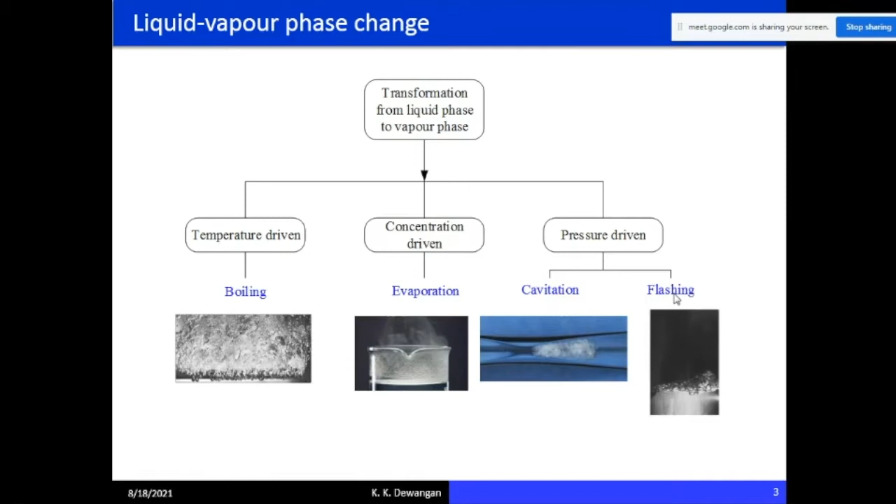Flashing is a more common term used with different words for this phenomena - flashing, flash evaporation, rapid boiling, front propagation, adiabatic phase change, and so on. Because in this process, we are not providing any kind of heat for the phase change - it is pressure driven. So, if you are taking one common definition for this flashing or flash evaporation phenomenon, it is...

When liquid is in a saturated state, or in a subcooled state, and it is suddenly depressurized, the liquid becomes superheated at that reduced pressure. For example, if a liquid in a pan is at 80 degrees centigrade at atmospheric pressure, and we reduce the pressure by some method to 0.2 bar, at 0.2 bar the saturation temperature is nearly 60 - I don't know the exact value, but it's close to 60. Since the initial temperature is 80 degrees and the saturation temperature at the reduced pressure is 60, the liquid becomes superheated, which is a non-equilibrium or unstable state.

Then what will the liquid do? The liquid gains thermodynamic equilibrium through rapid evaporation. This kind of phenomena we call flashing. Coming back to the definition: when liquid initially in a saturated or subcooled state is suddenly depressurized, the liquid becomes superheated. Then, to regain the thermodynamic equilibrium state, rapid evaporation takes place. That's called flashing or flash evaporation.

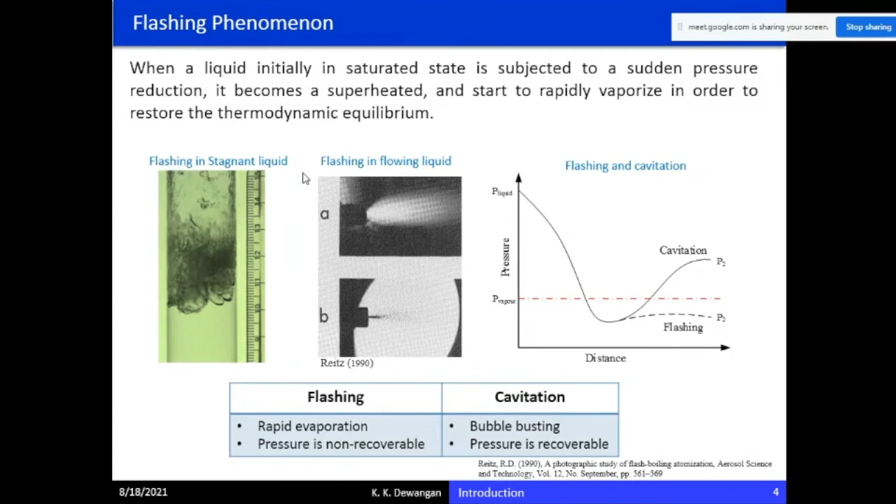Now, why do we need to study this flashing process? There are so many applications, starting from desalination, that is purification - there is a conversion of saline water to drinkable water. There may be a future requirement for this due to the lack of drinking water.

This desalination process is based on flash evaporation. Another application is spray and atomization, like in internal combustion engines where they use atomization. Nowadays there's much more interest in better atomization for better combustion processes, and flash evaporation also helps this atomization process.

Next is the medical industry, where we also use flash evaporation, such as in nebulizers and inhalers. The medical industry is very rich in this now. Flash evaporation is a main phenomenon for spray formation. The nebulizer and inhaler are utilized well for patients facing problems with their inhaling system.

Next is the power and cooling cycle. We already saw the geothermal flash power plant, where some kind of evaporation process uses flash evaporation like that.

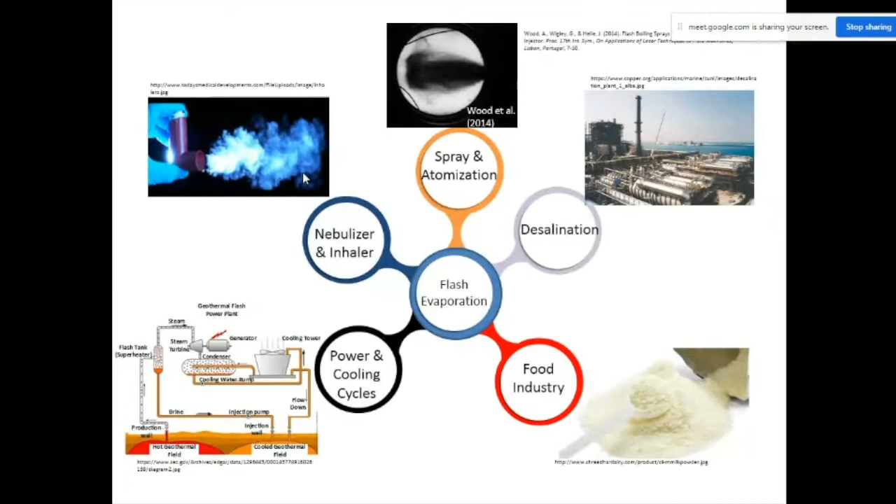This flashing phenomenon is not always beneficial to us. It is not that flash evaporation only gives us a number of applications - this phenomenon also causes some critical issues in hardware. So understanding it is very important, either to prevent accidents or to utilize the phenomenon.

Just like a knife invention, we need to study this phenomenon both for its applications and to avoid these kinds of accidents.

Like the loss of coolant accident, which is a very dangerous and huge accident in nuclear power plants, where cooling liquid is circulating in the pipe at very high pressure and high temperature. If there's any crack in the pipe - for example liquid flowing at 50 bar - and a crack occurs, there's a sudden blast. This is called a loss of coolant accident.

Then there's the volatile liquid accident, which is very rare but well known - like the blasting of an LPG cylinder in a house. LPG, liquefied petroleum gas, is compressed and stored in the cylinder in liquid form. If there are any cracks, normally it's not a problem, but in many cases we hear about LPG cylinder blasts in the news, which are very drastic in nature. This blasting is also associated with the flash evaporation phenomenon because it's a very rapid expansion process. If any crack happens by any medium, liquid comes out from the cylinder in an uncontrolled manner, causing the blast. And if the liquid stored in the container is flammable, then this problem becomes very critical.

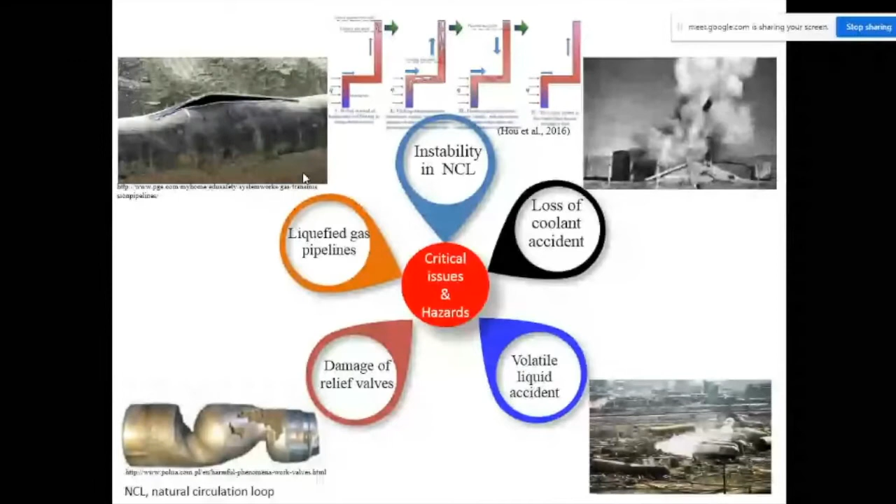I want to highlight one specific point. The flash evaporation topic is very broad, and I've only covered one part of it, which is the flashing front and nucleation sites.

Before going to the main experiments, let's see what flashing is, using the PV diagram, that's pressure versus specific volume. For water, we know the saturation curve well: liquid phase, liquid-vapor phase, and vapor phase, with the critical point and saturation lines. Until undergraduate studies, we've already seen these things, but there's an insight that is often missed in undergraduate books.

If we take the isothermal line in the PV diagram for water, this is a constant temperature line going down. We know it reaches the saturated liquid line. In the liquid-vapor phase change process, both temperature and pressure are constant, then it comes to the vapor side.

But in the liquid region and vapor region, between these two there is an unstable region, which we call the liquid-vapor zone or liquid-vapor dome. If you look very deeply in this region, the line is not straight. The isothermal line goes down, reaches a minimum point, then increases again, with curve-like behavior.

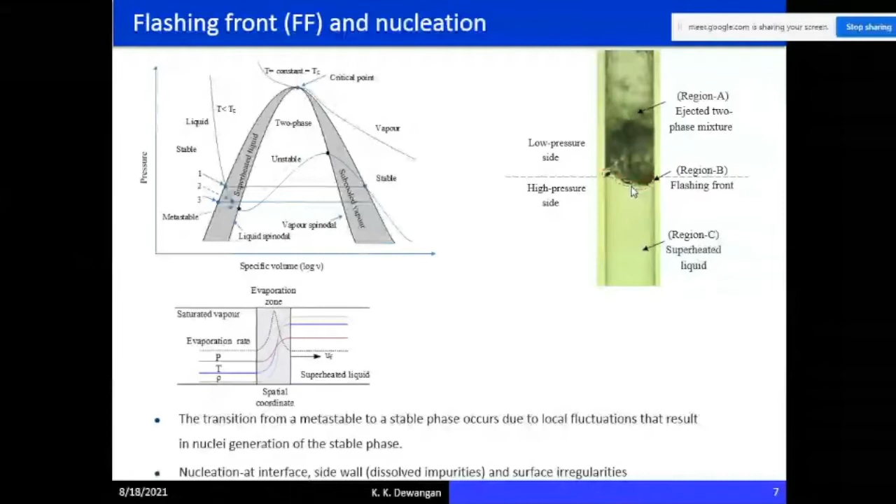Similarly here, an evaporation front is propagating through the liquid, ejecting the two-phase mixture. Why do we need to study this flashing front? First, for fundamental understanding of the phenomena. If a liquefied or compressed liquid cylinder bursts, we need to know how evaporation will take place, how much the evaporation rate and mass flow rate will be. This flashing front gives a systematic way to analyze this kind of accident.

Now we come to the gas dynamics aspect of this process, because pressure changes are involved, and it's not only associated with thermodynamics.

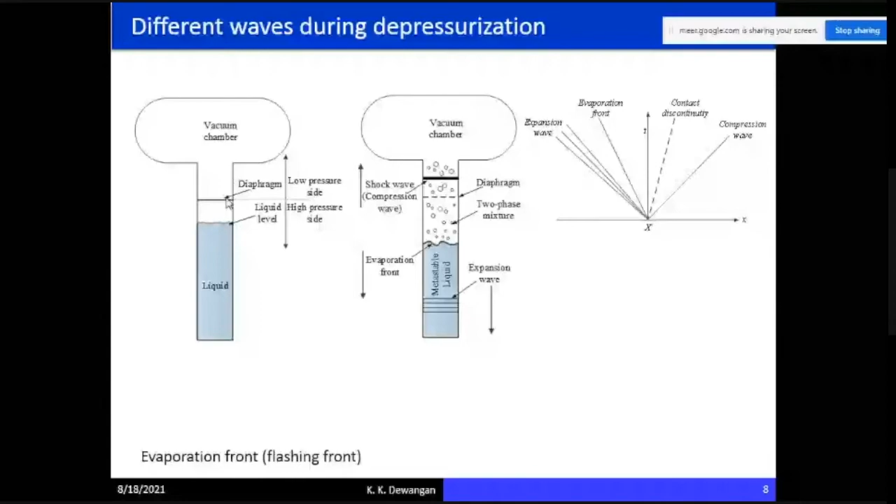First, consider this arrangement: a vacuum chamber and a liquid container. The liquid container is at high pressure, which we can consider as atmospheric pressure, and the vacuum chamber is at low pressure, like 1 millibar. We separate these two chambers, high pressure and low pressure, with the high pressure chamber containing liquid in equilibrium condition. We separate these two by a diaphragm, a restriction between them. Once the diaphragm is ruptured, just like in a shock tube experiment, where a diaphragm is used, different waves associated with this start propagating.

In the high pressure chamber, an expansion wave is propagating.

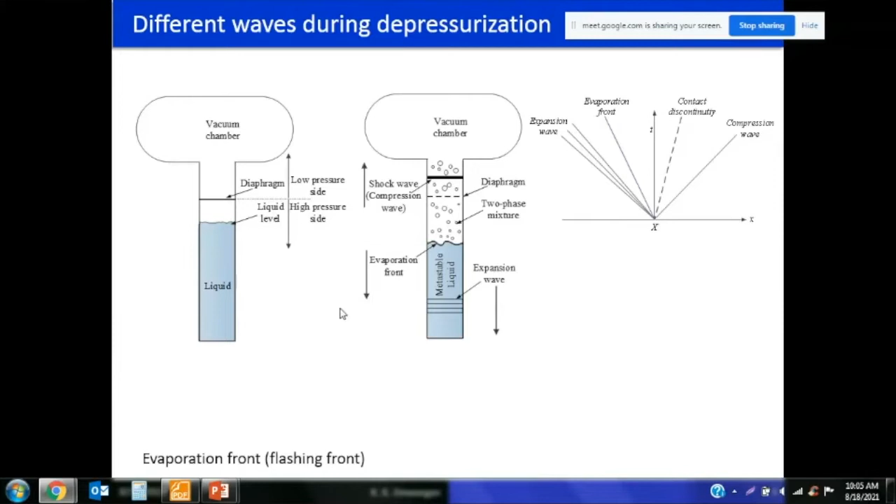Then we can see all these waves in a time versus space plot. In the low pressure chamber, a compression wave, or shock wave, is propagating, followed by a contact discontinuity. In the high pressure chamber, an expansion wave is propagating, and the evaporation front, or boiling front, is following the expansion wave. This is a brief overview of the gas dynamics aspect of this flashing phenomena.

This flash evaporation phenomena is not only about thermodynamics, it also involves gas dynamics. Different waves are associated, different thermodynamic phenomena occur, and even multi-phase phenomena are involved. That's why it becomes very complex, and we cannot analyze all the things together. We pick some aspects from the gas dynamics side, and we can solve others using the thermodynamics aspect.

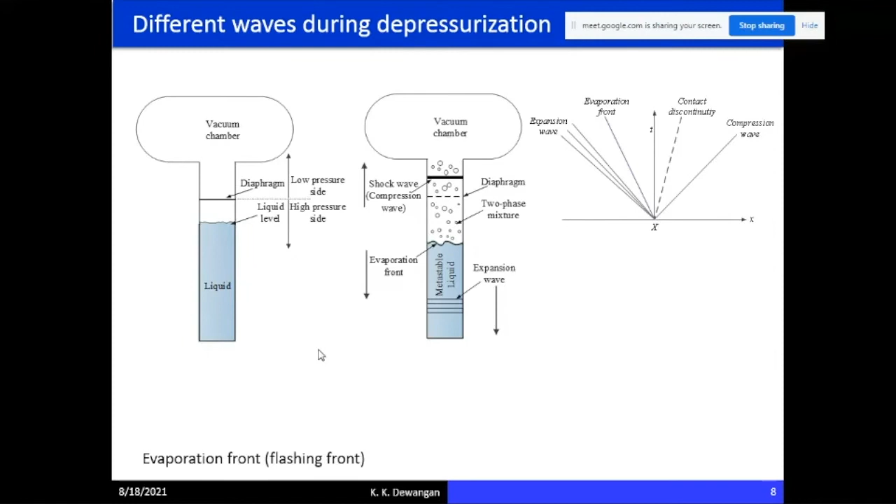This phenomena occurs if the liquid is suddenly depressurized, and different scenarios may be possible. I just listed these phenomena. If the liquid becomes superheated by sudden depressurization, nucleation occurs and evaporation takes place. One possibility is no bulk nucleation at all. Nucleation is the first stage of formation of a new thermodynamic phase, and with no bulk nucleation, there is no evaporation front.

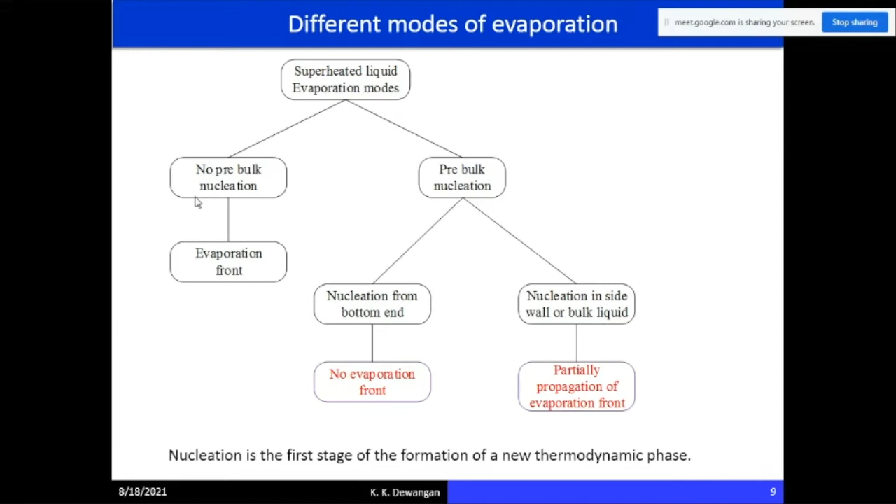The second case is pre-bulk nucleation, where nucleation may start from the bottom end of the tube; then again there is no evaporation front if nucleation starts this way. This may become clearer once you see the experiment, showing how different types of evaporation may take place. If nucleation occurs at the side wall or in the bulk of the liquid, there is partial propagation of the evaporation front.

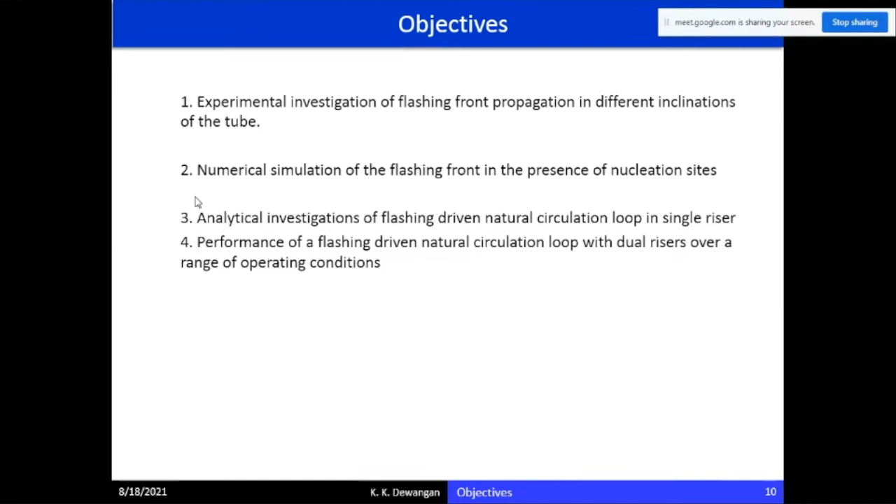The objectives I want to cover here: the experimental investigation of flashing front propagation at different inclinations of the tube; second, a numerical simulation of flashing front in the presence of nucleation sites, to see what happens if nucleation sites are present; and third, an analytical investigation of flashing driven natural circulation in single riser natural circulation, as well as the two riser case we already studied.

The first one is experimental investigation. For the background, this process or phenomena was already discussed nearly in 1962, when Terner observed by visualizing the experiment and found out that the flashing front is there and it's propagating in the superheated liquid.

After that, continuous research has been going on, due to advancements in high-speed cameras and better measurement systems. Researchers are more interested in this area to understand the physics of this process, and different parameter studies are going on, such as the effect of diameter, the effect of degree of superheat, and the effect of inclination.

But there is no systematic study about the inclination - how, if the tube is inclined, what will happen? Because we know that liquid flow in a horizontal or vertical tube, the phenomena may be different. And if it's a two-phase and boiling process, the phenomena is entirely different, because of the different flow regimes we can find.

This process phenomena has already been studied recently, up to 2017 - even this slide I made up to that year. But the study of this process is still going on; it's still active.

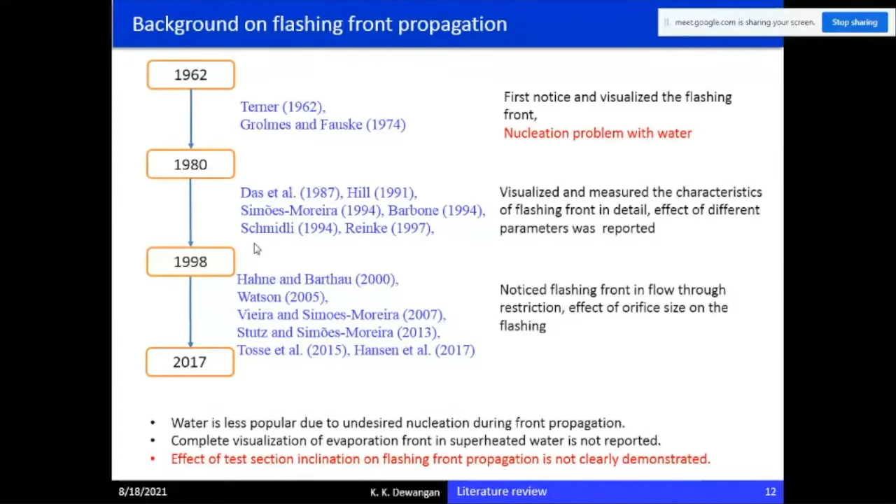Next is the effect of inclination. Many people have tried it, but not to a certain level - what is the effect of a particular inclination of the tube on the flashing front?

Then this is the experimental setup. We made it like a shock tube experiment, but slightly different because we are using water here. There is a high pressure section called the driver section, and a low pressure section, separated by a diaphragm. We used a borosilicate glass tube with inside diameter 22 mm and outside diameter 26 mm, length 50 centimeters, nearly half a meter, filled with water up to 45 centimeters.

This much long tube we used, filled with water - clean water, maintained at some constant temperature by circulating water in a jacket around the tube, to maintain one constant temperature for the experiment.

This part is the high pressure section - we can say atmospheric pressure is high pressure, because the low pressure section is nearly 13 millibar. In the low pressure side, there's a large vacuum tank or reservoir. Comparing the glass tube volume to this reservoir volume, the reservoir is more than 150 times larger, sometimes going up to 200 or 300 times - it's a very huge size.

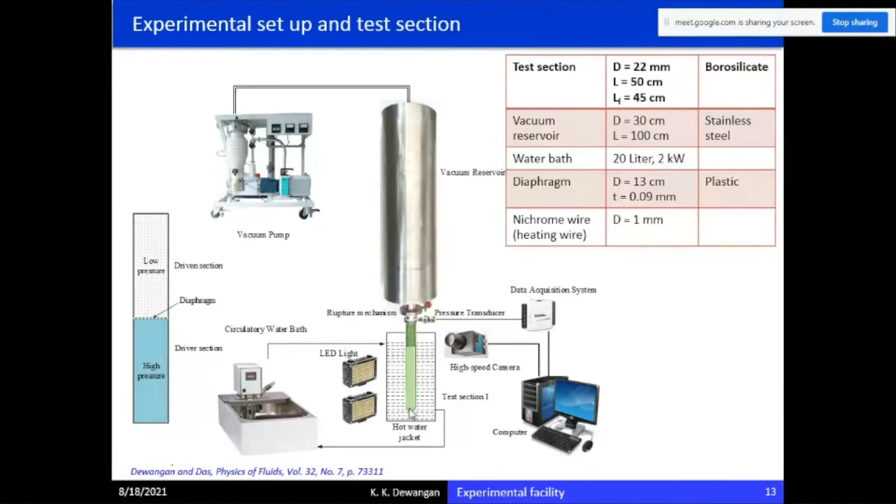This is a rupturing system. We introduced this rupturing system, a new kind, very cheap and effective. The mechanical rupturing system is a very complex mechanism, but this is a very simple thing. We used a plastic diaphragm, commercially available polyester sheet or transparent plastic sheet.

We cut it in a circular shape and fit it here. There are two collars: the upper collar is connected with the vacuum cylinder and the lower collar is connected with the tube, which is borosilicate. Between these, there are upper and lower flanges, and between the flanges there is a neoprene gasket, with the plastic diaphragm inserted between the gasket.

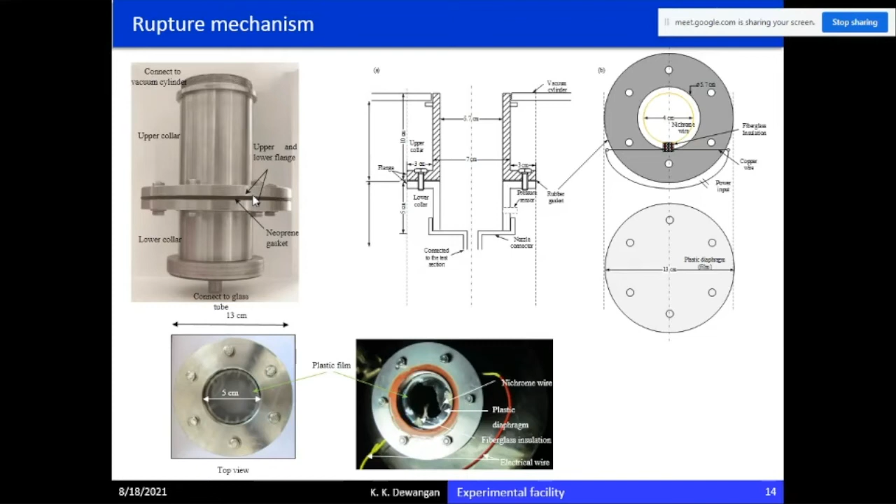We just put one nichrome wire for the heating. Because we use the plastic diaphragm for rupturing, we can avoid a mechanical system. Instead we use a heating system: we put one coil of nichrome wire and supply electric power so that the wire burns and the plastic diaphragm ruptures. Then communication is established between the high pressure and low pressure channels.

The test section - I'll discuss the two kinds we used. The first one is a long tube, open at one end and closed at the other. This kind of tube is restricted from measuring pressure at the bottom; we are only able to measure pressure at the top. But this tube gives the advantage of seeing the complete phenomena in the tube.

The second test section we designed allows pressure measurement at both the top and bottom of the tube. This tube is like a condenser part - we fill it with liquid, and the liquid temperature is maintained constant by circulating hot water in a concentric tube. A pressure transducer is fitted at the top of the tube and another at the bottom.

Since we use water, it offers a number of nucleation sites - undesirable nucleation, because we have to suppress nucleation sites to see the systematic propagation of the boiling front. Then we need to keep this pressure sensor, which is a metal part, under control. If the metal contacts liquid and temperature goes beyond saturation, it starts nucleation from this pressure sensor, which we don't want. We have to suppress this nucleation site.

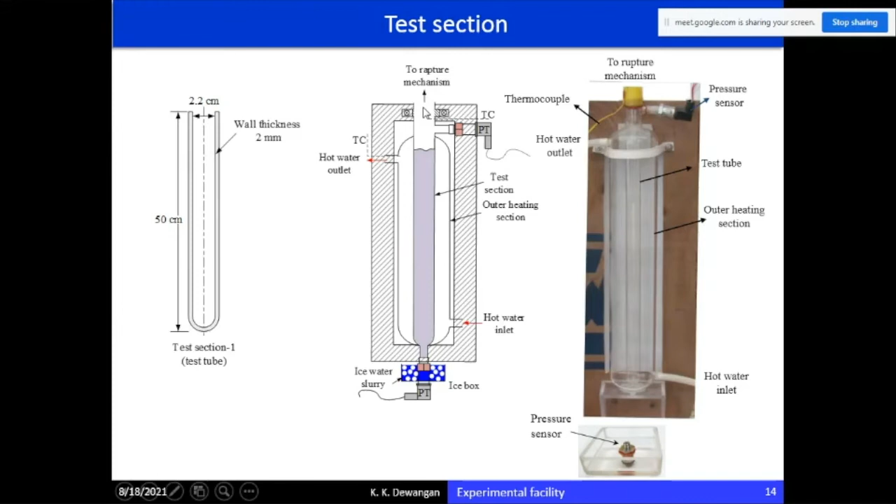This part is connected with the mechanism system, that is the lower collar. The experiment is quite fast, though slower than typical shock tube experiments because the evaporation process is associated with it. But the experiment is completed - covering the maximum visible degree of superheat, tube diameters, and depressurization - in a maximum of 6 to 7 seconds.

But the initial preparation takes a lot of time - maintaining the vacuum pressure and a constant fixed temperature of the water bath takes nearly 1 hour. After that, we boil the water for the degassing process. Degassing means rigorously boiling and applying vacuum to remove the dissolved gases - that's called the degassing process.

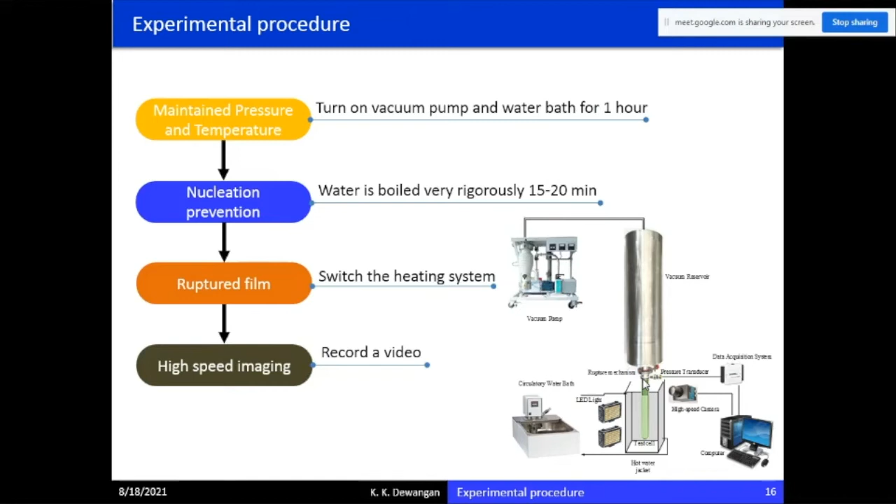Initially, we use clean distilled water so that there is less possibility of nucleation. Then we fill the water in the tube, keep it in the water jacket, and maintain constant temperature. We fit the rupturing system, then switch on the heating system. At the same time we switch on the camera, so that when the diaphragm is ruptured, pressure communication is established between the high pressure and low pressure chamber, and the process starts. We record the pressure and temperature, and the high speed camera captures the phenomena.

Before going to the experiment, I want to highlight the initial conditions. We maintain the initial pressure at atmospheric pressure. Initial temperature ranges from 40 degrees centigrade to 96 degrees centigrade for the water, because if you go beyond 96 degrees centigrade, boiling will start itself in the tube and we cannot clearly perform the experiment. That's why we restrict the initial water temperature up to 96 degrees centigrade.

For the reservoir pressure, we maintain a vacuum pressure of 13 millibar in all cases. At 13 millibar, the saturation temperature of water is nearly 11 degrees centigrade. Then the starting process begins.

This flow process can be divided into two stages: the first stage is front formation, and the second is front propagation.

Once the system is depressurized, different waves are associated with that. These are expansion waves propagating in the liquid phase, transmitted through the liquid, going to the bottom end of the tube and coming back to the surface. This reflection and transmission of the pressure wave is continuously going on.

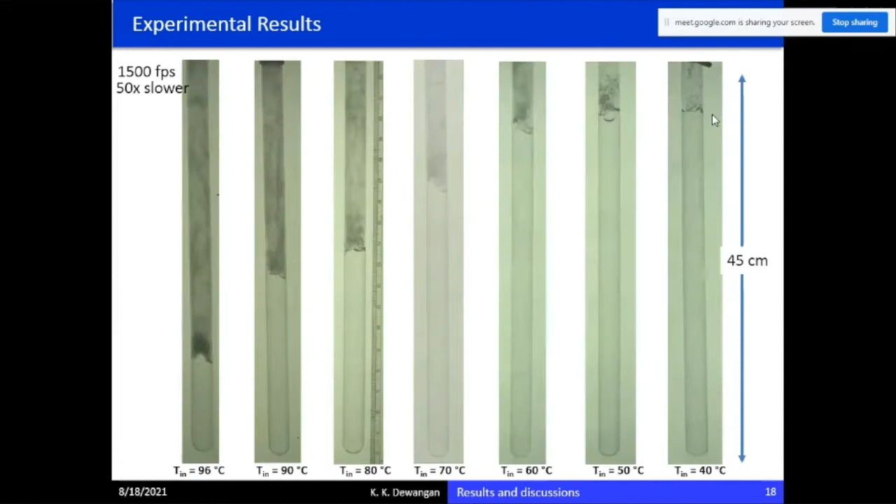The propagation velocity is fast. At an initial temperature of 40 degrees centigrade, the evaporation is very slow compared with 80 or 70 degrees centigrade. In all the processes, we can see the effect of different initial temperatures.

The front propagation is very irregular. We cannot predict the same thing every time. Even if we can predict the speed of front propagation in some manner, we cannot reproduce the front shape. We performed the experiment 2-3 times, and we cannot reproduce the same thing.

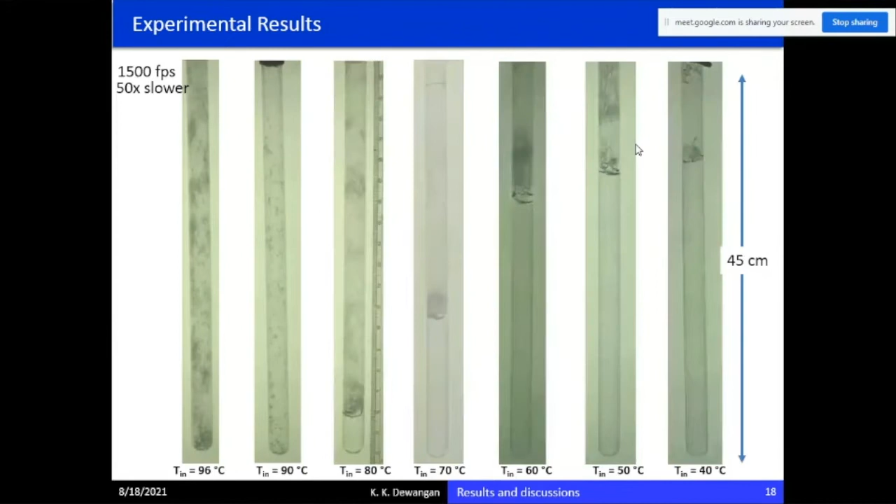I'll skip these things because some other videos are also there. After analyzing the recorded videos in MATLAB with image processing, we take the front shape. You can see the front shape at 96 degrees centigrade, because some nucleation occurs above. After that, one systematic front propagates.

You can see that the front shape is very random. Sometimes nucleation occurs from the side, sometimes it makes a different shape, and sometimes there's a small liquid jet within the liquid in the tube. That's why it's very random, but the front velocity we can predict, or at least find some range for it.

After this image analysis of front location, we plot the front location with time, and the front velocity with the degree of superheat. We can see it's obvious from the video that front velocity is higher at a higher degree of superheat, or higher temperature.

Next is the basic experiment. Now, the inclination - what is the effect of inclination? Meaning, if we keep the cylinder horizontal or inclined, what will happen to the evaporation rate? That experiment is there.

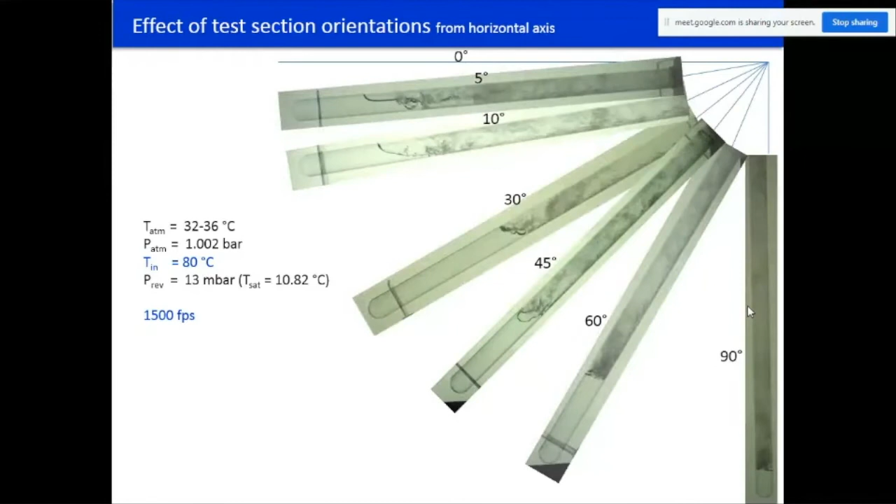Due to the 5 degree inclination, evaporation occurs near the surface only, and sometimes due to the inclination, the liquid interface moves toward the bottom of the tube.

For this front shape and velocity, we plot front velocity against orientation. For different orientations, we plotted the front velocity and observed that it increases up to 30 degree inclination, and at 30 and 45 degrees it shows a nearly constant velocity.

We repeated the experiment many times, but this trend is still there. After 45 degrees, it follows another trend, so from 45 to 90 degrees the front velocity increases again.

At vertical, it's easier for the two phases to escape - that may be the reason, but it requires much more experimentation to clearly say what the effect of inclination is. Still, we observe that inclination may affect the front propagation velocity.

There is another experiment based on one closed tube - one side open, the other side closed, like a test tube. This experiment will be synchronized with pressure measurement. We put pressure sensors at both the top and bottom of the tube.

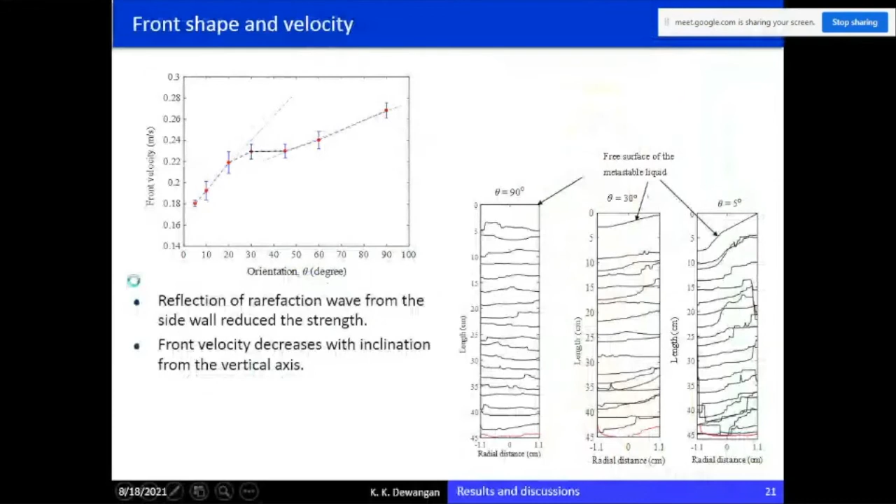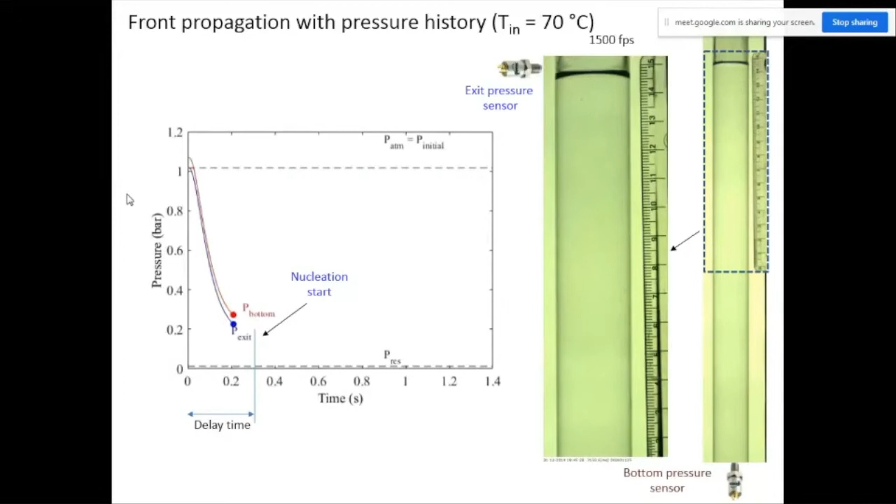At it reached the one point, then at that point it starts the nucleation here. That is one nucleation from the side wall, then it spreads over the tube and forms one evaporation front, and it's propagating. At the same time you can see these two pressure curves are parallel to each other—the exit pressure and the bottom pressure have some deviation between them due to this liquid column.

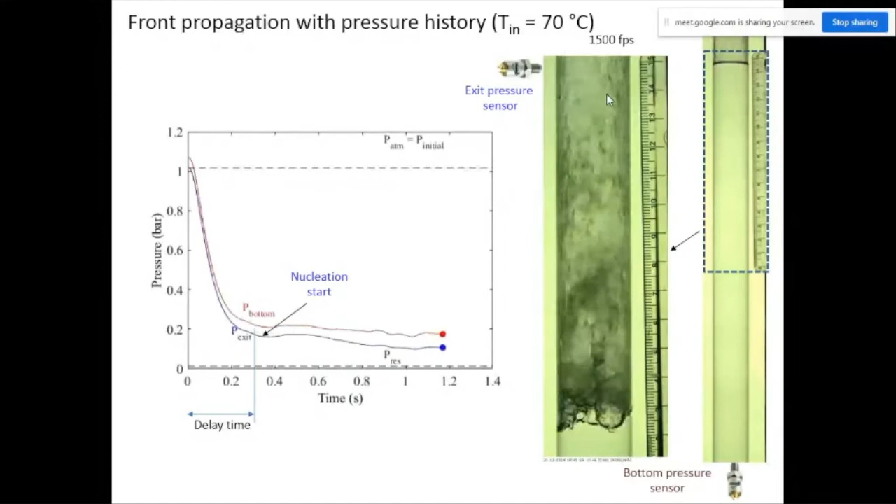But again I am just saying that the process is not repeatable, because this process is very complex—the random or irregular nature of the liquid. The evaporation will take place and propagate in the superheated liquid. But we successfully suppress undesirable nucleation through degassing and proper boiling of the water. We suppress many undesirable nucleations.

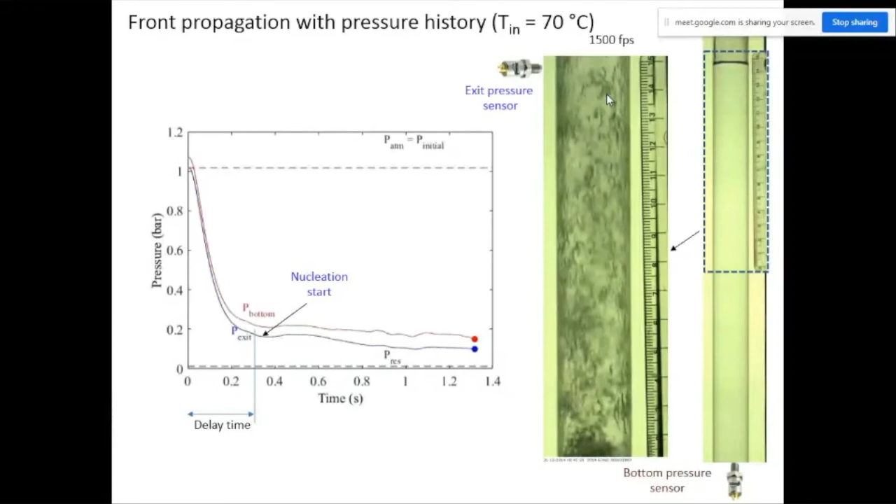Even in a single day, 10 hours we perform one experiment like that. It's very complex—if some nucleation sites are available or present in the tube, that experiment is destroyed.

And one important thing we find out from this pressure measurement and this recorded image is the delay time. Delay time means once the system is depressurized, liquid becomes superheated, but even then it doesn't start evaporation. That time between depressurization and the starting point of nucleation—that duration—we call the delay time. And this delay time decreases with increasing degree of superheat.

If you increase the degree of superheat, the delay time decreases, meaning very fast evaporation occurs. There is no mathematical model, and even the physics is not clear about the delay time. If liquid reaches the superheated state, up to what time duration evaporation starts, nobody can say for certain. But through systematic experiments, we can at least find the trend about the delay time based on degree of superheat.

But I think there's much more thermodynamics involved in this delay time. Maybe in future someone will explain more details about the delay time—how the liquid starts evaporation, at what time the liquid goes into evaporation once it reaches the superheated state.

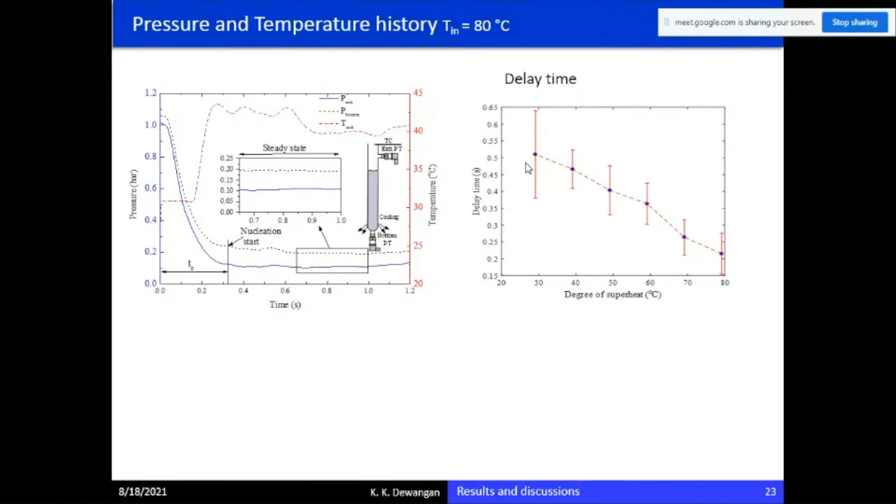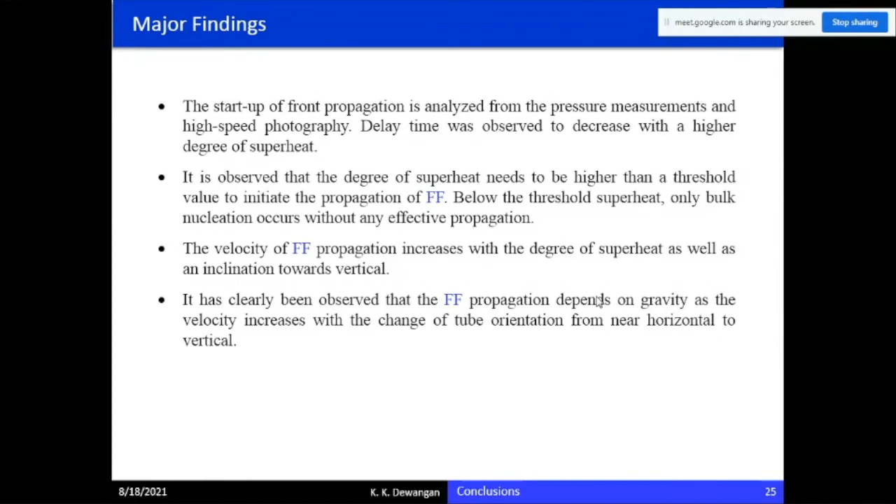Okay, next is the numerical simulation of the flashing front in the presence of nucleation. We already saw the one image of how, if a nucleation site is there, the flashing front propagation may be affected.

This is not directly related to the application, it's only for fundamental understanding of how a nucleation site behaves. It indirectly affects the evaporation rate: suddenly, if a nucleation site is there in a tube, it pushes the liquid towards the low pressure section. That means liquid is added as this bulk amount is going out, and it suddenly evaporates outside of the liquid. Then, if the liquid is flammable, something like a blast may take place.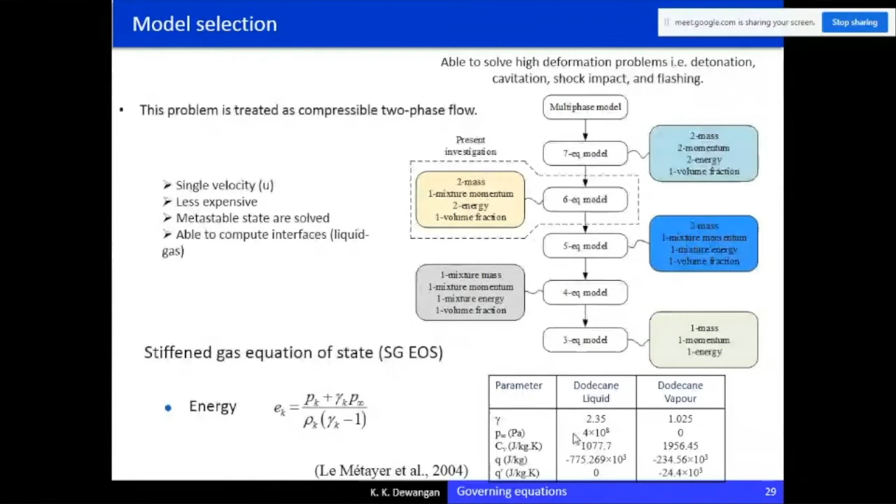This equation is based on the two fluid equation model: one set of equations for the liquid, one set for the gas. In between there is an interface, and to handle the interface this category comes in: mechanical relaxation and heat and mass transfer terms.

If suddenly we depressurize the system, like in a shock tube experiment, one side is liquid, another side is gas. We separate these two sections by a diaphragm. Suddenly we rupture the diaphragm, then the liquid pressure is different and the gas pressure is different, but at the interface we have to have one common pressure. The liquid phase and gas phase have different pressures, but at the interface it should have the same velocity and same pressure.

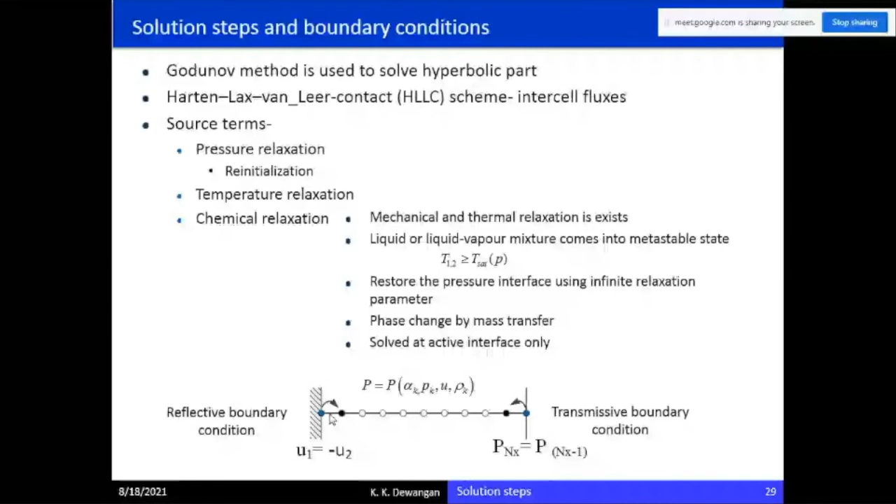Now the solution for the mechanical relaxation: how do we solve it? For mechanical relaxation, we only take the time-dependent terms on the left side, the hyperbolic equation, and the mechanical relaxation parameter. We solve this and get one algebraic equation with one unknown parameter, the common pressure at the interface. We solve it for the common pressure and find the new relaxed volume fraction. Whatever we calculate after performing the relaxation, we call the relaxed pressure, relaxed volume fraction, and relaxed temperature.

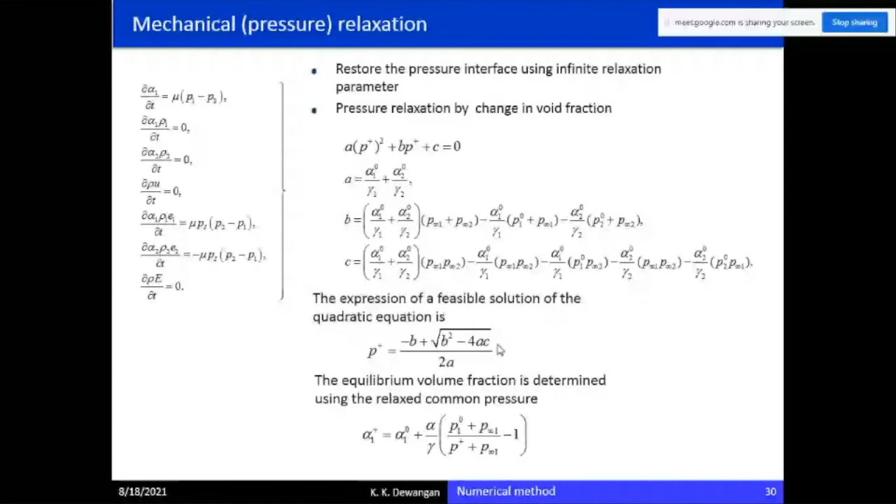We are not going the reverse way, because the pressure relaxation is different. Pressure comes very shortly to one common pressure. But there is a temperature difference in two systems, and it will take slightly higher time compared to the pressure relaxation.

Okay, these two chambers are there with different pressure. You mix it by rupturing the barrier, and it very quickly comes to one pressure. But if there are fluids at different temperatures and you remove the barrier, it will take more time to reach one thermal equilibrium condition, or one common temperature. That's why the solution procedure is like that: first mechanical, then thermal, and then chemical relaxation.

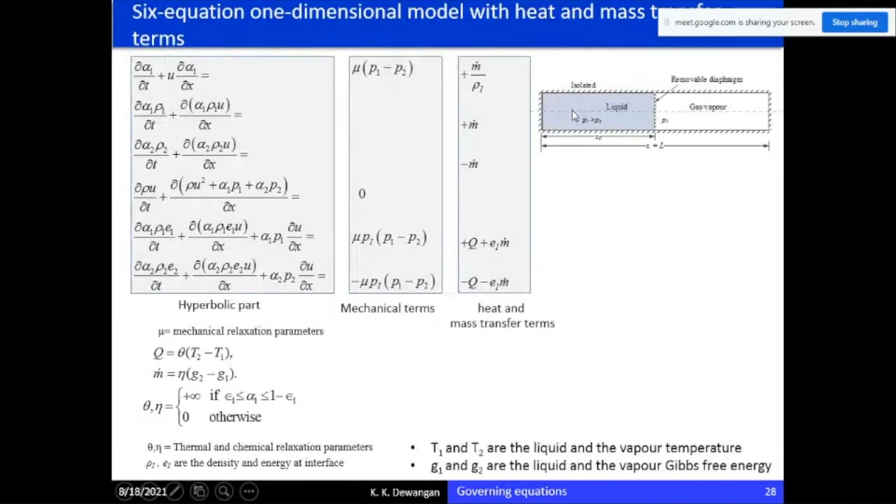We use this particular model, which is a diffuse interface model. In the diffuse interface, there is no sharp jump in pressure or volume fraction, like that. It's diffuse, meaning slow diffuse terms. That's why we call it the diffuse interface, and at this interface we only solve the thermal and chemical relaxation.

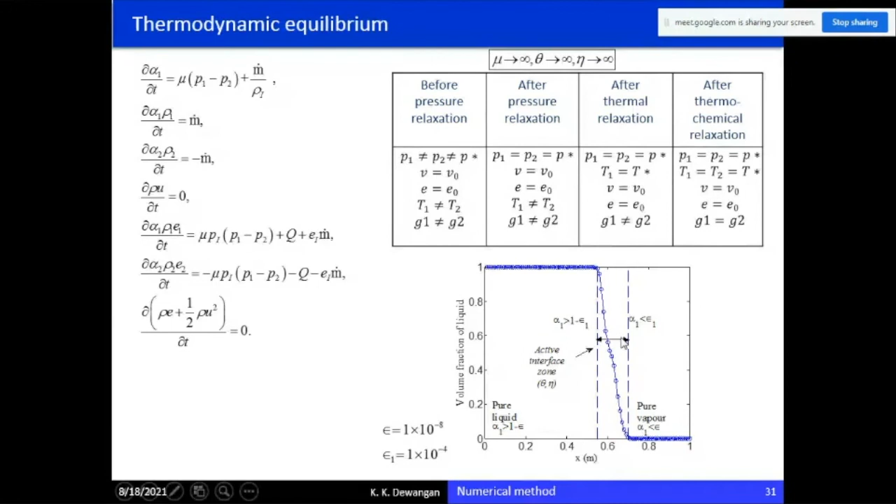But if you see the literature, front propagation with a nucleation site is rare. Nobody starts a simulation to see what will happen when a nucleation site is there. But we have already seen this in the experiment, and that's why we are interested to perform the numerical study.

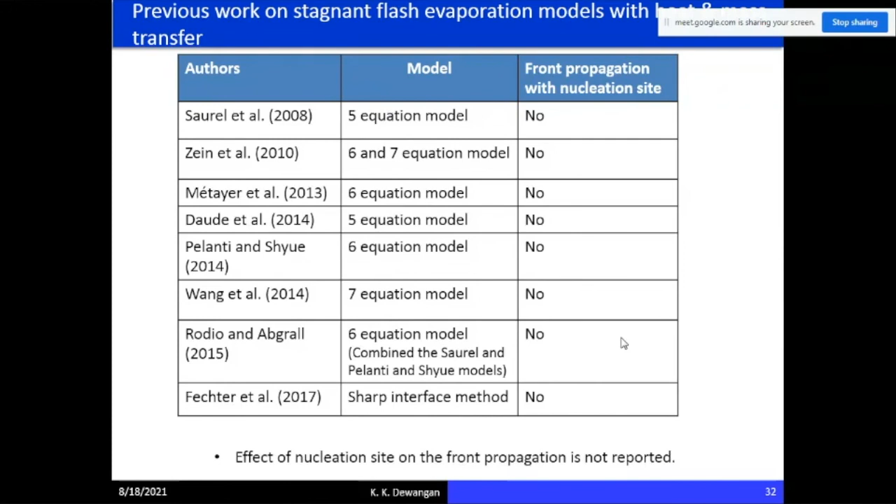Then for putting the nucleation site, we are putting this nucleation site in the liquid. We assume for this that we are not going with a random nucleation site in the liquid; we just put one fixed nucleation site in the liquid.

Okay, sorry for that. Now, this is a one-dimensional model, and we have to put one nucleation site in the liquid.

For the one-dimensional model, we put one gas particle on the liquid side, and that gas particle has the same density as the gas phase, meaning the vapor phase of the liquid. So if you are using dodecane liquid, then you take the density of the dodecane vapor, given that property, and the pressure is the same as the liquid dodecane. Dodecane is a fluid — we are not using water initially.

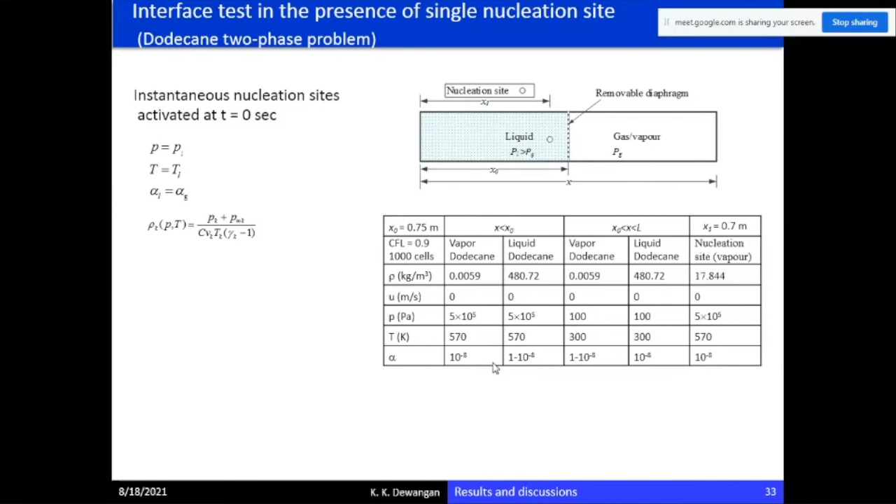Void fraction, this is a two-phase, two-fluid model, and this model we give the two-fluid model means...

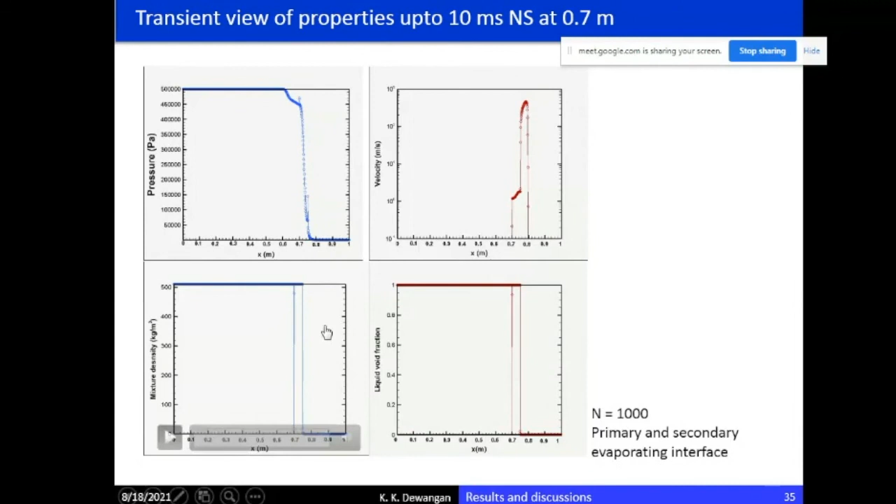Now you can see there are a lot of pressure oscillations between the nucleation site and the primary interface. The primary interface is here at 0.75 meters, on the surface.

Now, as the left side is a reflective boundary condition, the pressure wave goes to the left end and is reflected to the nucleation site. And again, the nucleation site passes some pressure wave through it, which reflects from the left end.

Again it oscillates between the left end and the nucleation site, because the nucleation site has a lower speed of sound compared to the liquid, so it's not allowed to pass through. It works like a barrier.

Now at this point, we can see that between the nucleation site and primary interface, evaporation takes place, and the front is propagating, but we are not clearly seeing here how the front is propagating into the vapour.

And at the left end, this numerical simulation is not clearly predicting, because at the left end we can see the liquid volume fraction decreased, but in the experiment it's not. That's because at this point, the delay time is important.

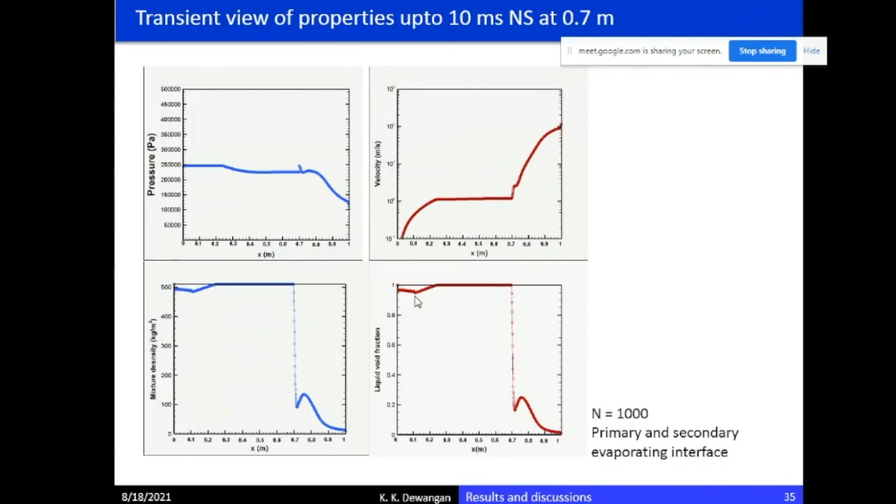Then we performed the experiment, the nucleation experiment, and we see the nucleation site in a superimposed image. We can see the nucleation site, how it grows and how the front propagates. This growth of the nucleation site is very high compared to the propagation, as already seen in a different image also.

Here also, we performed the same for the simulation and compared it. We are not quantitatively complete, but we qualitatively compare it—how this front velocity, how the growth velocity behaves.

After that, the merging of this bubble and the front occurs. Then again one new interface is formed, and then we see how it's propagated.

This is a numerical simulation result showing primary and secondary interface velocity versus time. The primary front velocity is your interface velocity, and secondary means your nucleation growth. You can see the secondary phase here.

We can see here three different velocities: primary front velocity, nucleated phase velocity, and primary front velocity after the collapse. The primary front velocity is very less, up to about 6 meters per second. Then the nucleated phase growth velocity goes up to near 350 meters per second, which is the growth rate of the bubble.

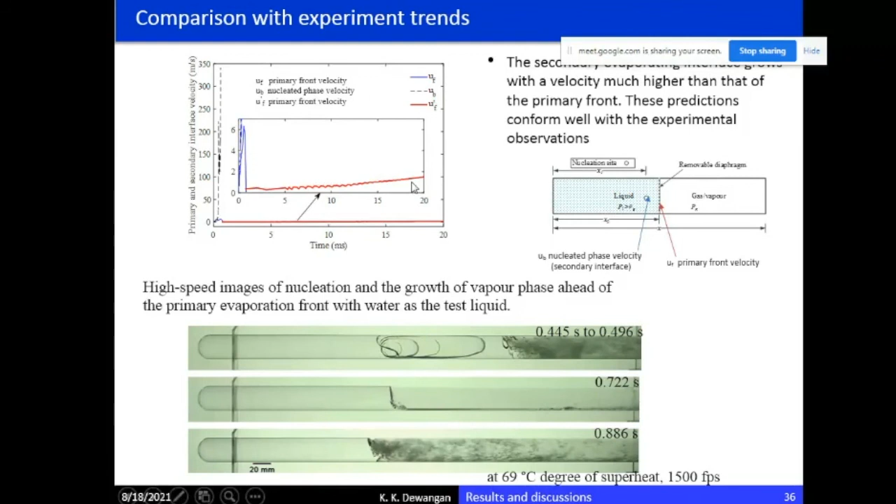I am not going to show these things further. I will come to the conclusion parts because time is limited, as some time is left for the question session.

Nucleation ahead of the flashing front affects propagation velocity. As we already saw, if a nucleation site is there, it affects the propagation velocity because it works as a barrier to pass the expansion wave through it. The presence of a nucleation site hinders the propagation of the expansion wave, and the wave gets reflected from the end of the computational domain in the reverse direction. Both cause a reduction in propagation. If a nucleation site is there, it reduces the propagation velocity.

Next is the growth of the nucleation site, growth in the nucleated phase. We already saw in the experiment that this speed is very high compared to the front. Also, the location of the nucleation site affects it. And we already saw the multiple nucleation sites case: if at a time there's more than one nucleation site, what is the effect of that. But this is a limited study. In future, more study will come giving 2D and 3D analysis of this classification. Is there any question?

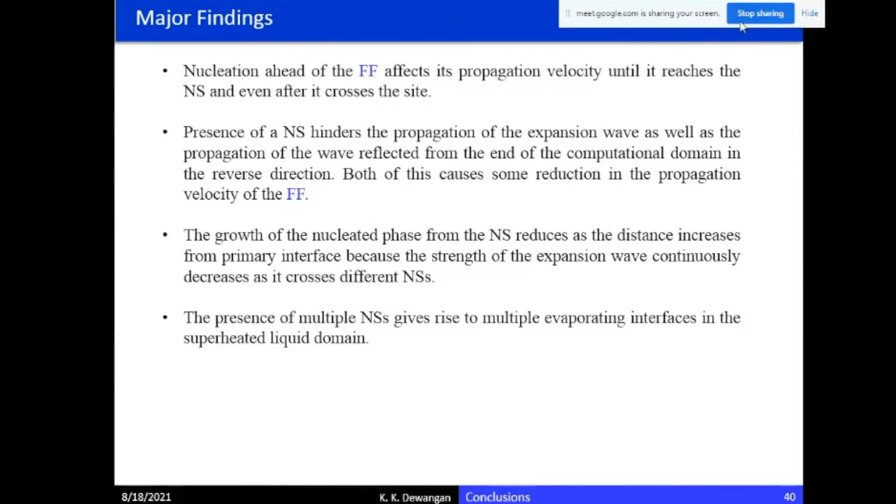Good morning, sir. Good morning. Sir, I have a doubt: why is the isothermal line not straight in the wet region of the PV curve in the flashing front? Actually, we studied in undergraduate thermodynamics or heat transfer that the line is straight. But why isothermal line... audible? Yes sir, I'm coming. Okay sir, thank you.

Then it's not constant, because if you perform the experiment, you can see there is a time when temperature is above the saturation point, meaning the liquid becomes superheated. Then it does not evaporate quickly. Its liquid does not evaporate immediately, which means pressure and temperature both do not remain constant experimentally.

But for the simplification process, we assume pressure and temperature are constant. Actually, if you perform the experiment, you can observe these things. This experiment is the same thing; we already measured it. The liquid becomes superheated, and then we can see that temperature varies, and pressure also varies. It's not constant in the two-phase zone.